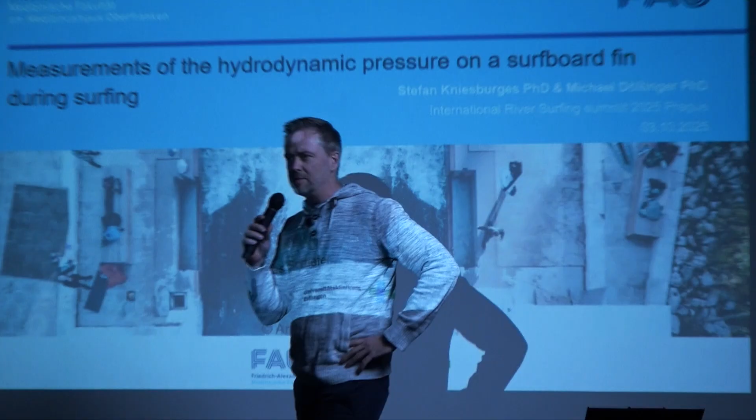My name is Stefan Kniesburges. Together with my colleague and boss Michael Döllinger, we are working at the medical department in Erlangen university, part of the ENT department—ears, nose and throat. We deal with the aerodynamics in respiratory systems, especially in the larynx.

The two vocal cords oscillate with a very high frequency, and about 8 years ago we thought about how to get students and topics for students. As Michael is a surfer for almost 25 years, and I'm a mechanical engineer focused on aerodynamics and aeroacoustics, we thought, why not simulate the surfboard or some surfboard fins? So we started, and it went on.

Our goal was to have at least one publication. Michael wanted it in his bathroom, but now we have a few more because it's so interesting, just from the physics. I want to give you today some insights into our work, and I hope I can explain it so everybody understands.

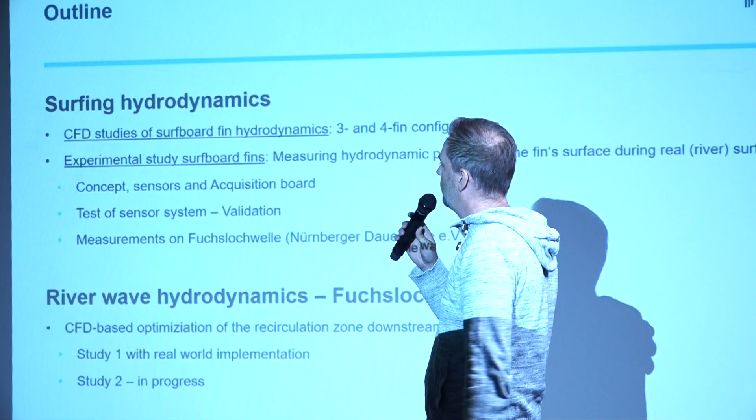This is the outline of my talk: the major focus today is surfing hydrodynamics, how we measured it. I'll start with some CFD simulations, as we started, and then come to the experimental study on surfboards, where we tried to measure the pressure at the surfboard fins during surfing. I'll also give you some impression of our work simulating the river wave in Nuremberg, the Fuchslochwelle, which we tried to optimize, and this will be the end of my talk.

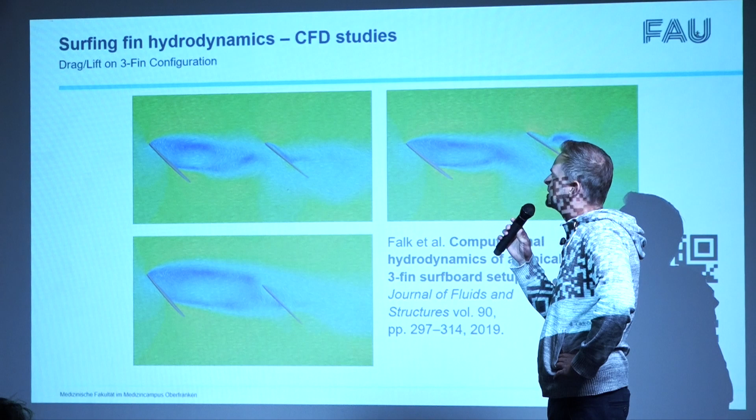So let's start with our simulations—the very beginning of our interesting side project beside the medical stuff. We started with a quite simple case.

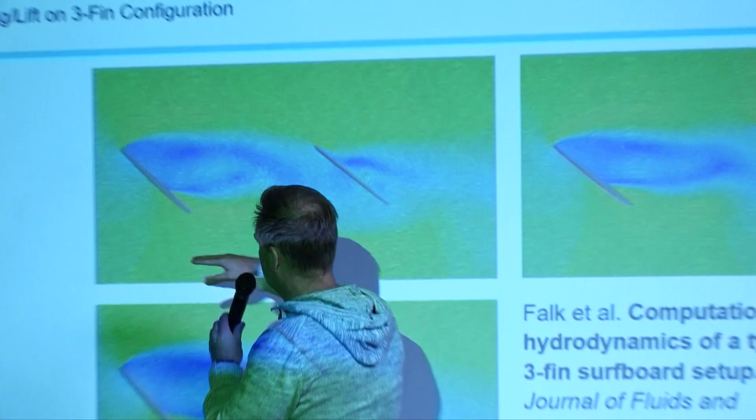We had a 3-fin configuration. Here you see the right side fin and the center fin, placed in a box full of water with an inflow from the left hand side. We increased the angle of attack—between the inflow and the chord axis of the fin—and found some nice separation areas, recirculation areas where the flow is separating from the fin.

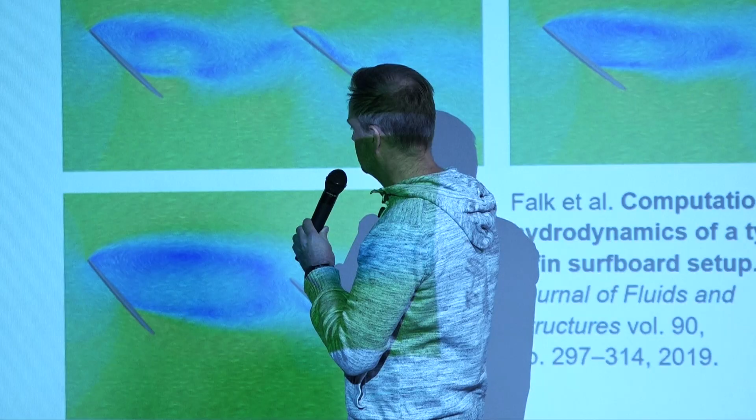It's quite similar to wings in planes, where you don't want flow separation, because then the plane is falling down without any resistance. What we found is some flow structures, vortices, which separate and push on this center fin.

We found that there is a force which can act on the center fin if your angle of attack is too large, with a frequency of about 14 Hertz. We heard from a guy from Wollongong who told us he sometimes experienced some shivering in the back, which could be this effect.

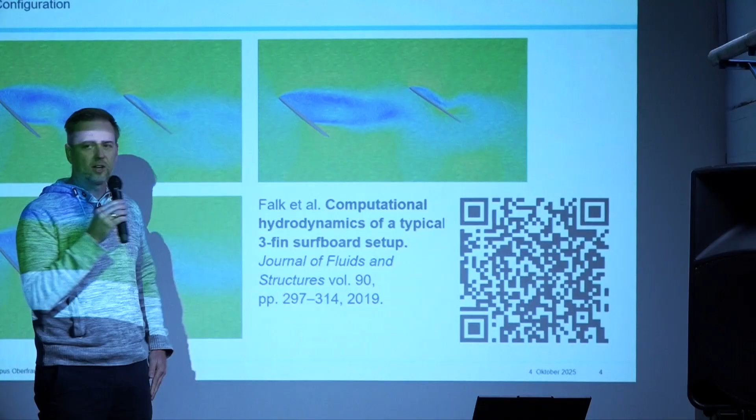So this was quite a similar simulation case, and if you want to learn more or read about it, you can scan this and get the publication in the Journal of Fluids and Structures, where we published our results.

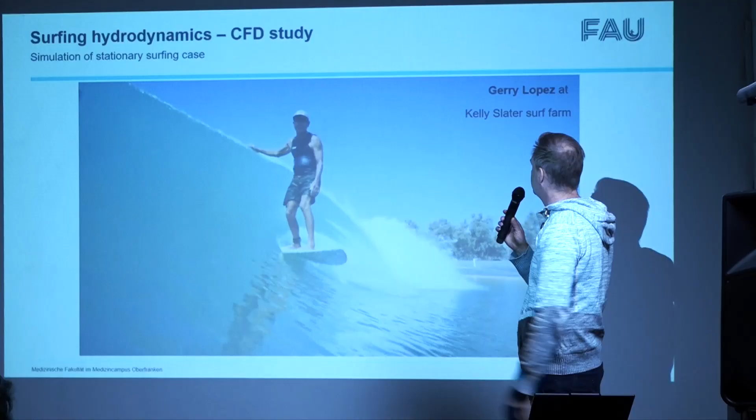Then another study, also a student project. A student found a video—it was Gerry Lopez at the Kelly Slater farm—and what he did is surf very constantly without any change on this wave. The student told us he could try to somehow measure the position, how the surfboard is constantly positioned on the surface of this wave.

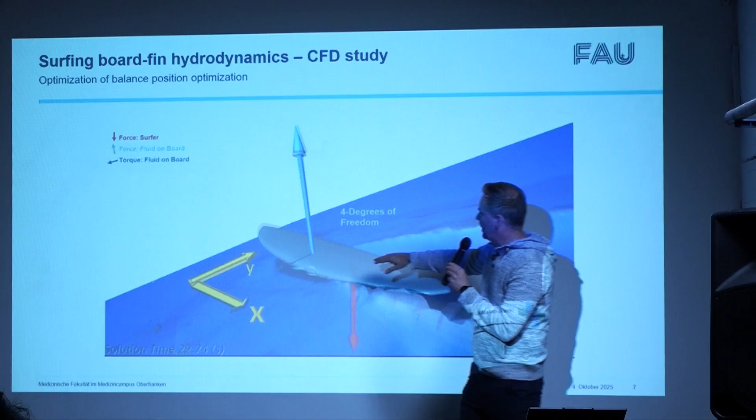He wanted to calculate the gravity force—where the gravity force acted by Gerry Lopez had to be at the surfboard to get this position. So he set up a CFD simulation with a free surface. He put a surfboard on the surface, held the position constantly, and then we had the lift force.

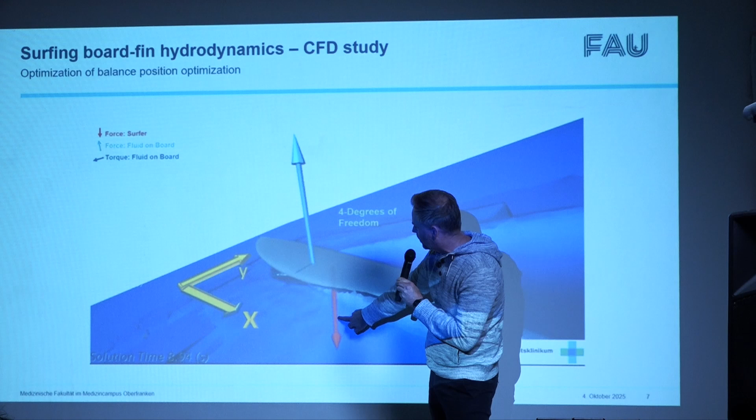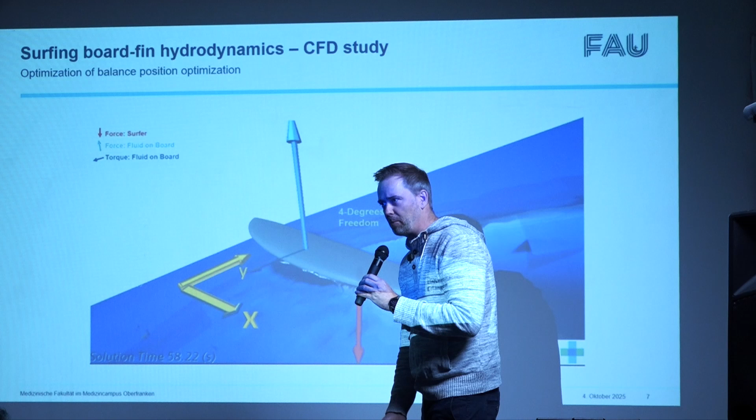We had here the lift force in blue from the water, and this is the gravity force. He developed a mathematical optimization algorithm which varied the position of the gravity force, the red one, so long that he could find a place where no force is acting in these 2 directions on the surfboard. So the surfboard is fixed on the surface, and when he found the correct position where he has no force in these 2 directions, that would be the point where the gravity force, pushed on the surfboard by Gerry Lopez, had to be for this video.

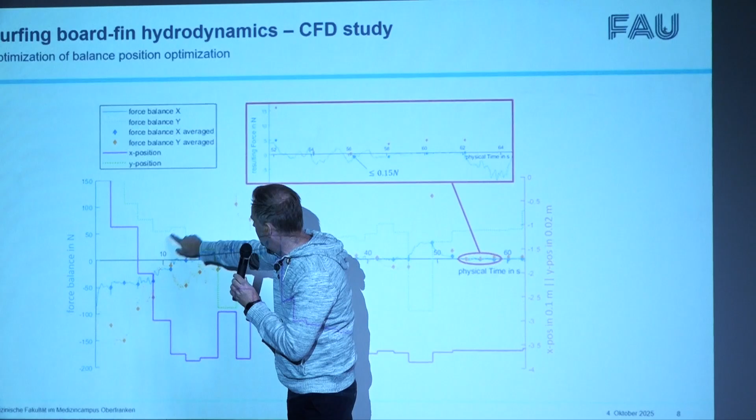And this looks like that somehow. So here you have the force balance in Newton, and you have the force in x direction in blue, this dotted line here, and this orange one is in the y direction, and the other 2 lines are actually the positions in x and y direction where the force has to act.

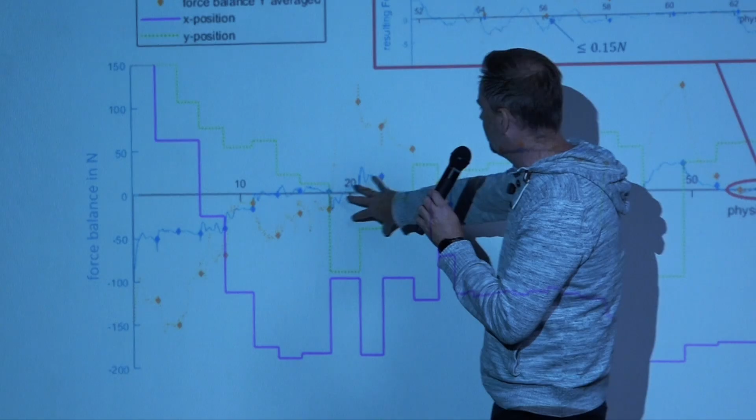What he did was simulate one position, then evaluate the force balance. If the forces are not 0, then the force would be positioned somewhere else. This was done for a lot of simulations, and at the end point we got both forces almost to 0, and then we had the 2 positions which are at the very end of the surfboard.

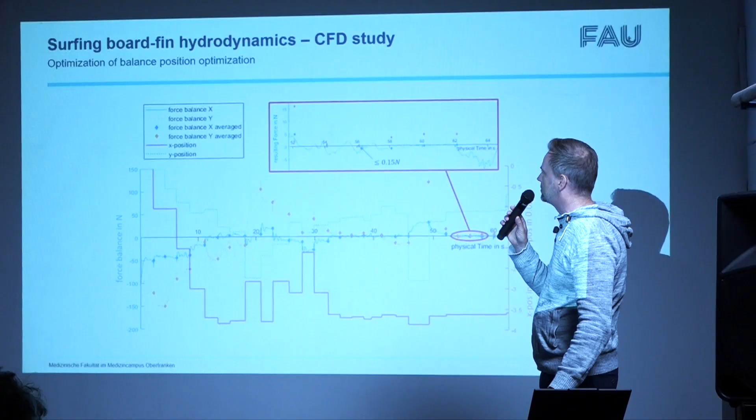So this was also a student project which we tried to publish soon. Those works were our motivations to think about what we can do next.

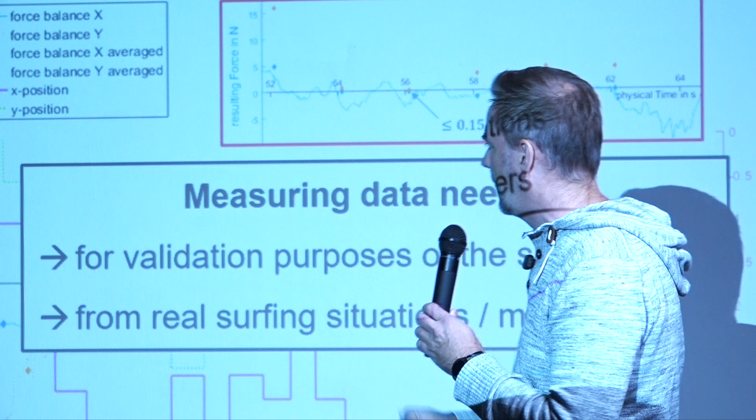If you are doing those CFD simulations, it's purely done in the computer. If you want to publish this, the reviewer will ask you, okay, it's only computer simulations, is that valid? Is it correct? Did you do correct modeling? Therefore you need to have some measuring data.

So data which were measured, and you can say, okay, here we measured velocity, and the velocity is similar to what we simulated, and therefore you can validate it. Also, we cannot simulate every surfing maneuver or everything because it's too expensive. So we need real surfing measurements in real surfing situations.

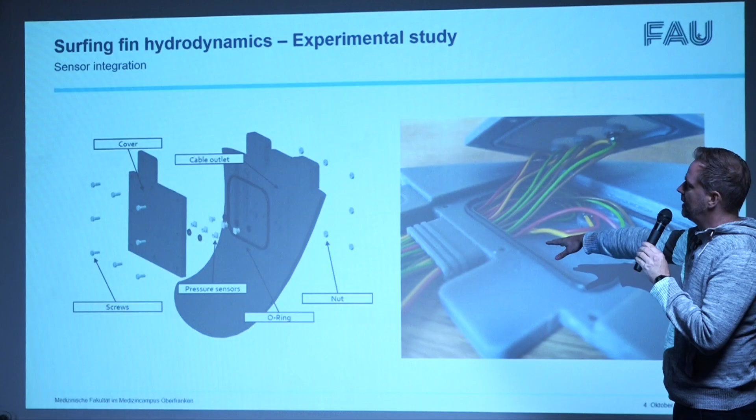So we started our project of the experimental study, and we measured the hydrodynamics on surfboard fins. We took an ordinary FCS fin geometry, then implemented a box in it sealed by a rubber ring, and placed very small pressure sensors on the inside and outside, on both sides of the fin.

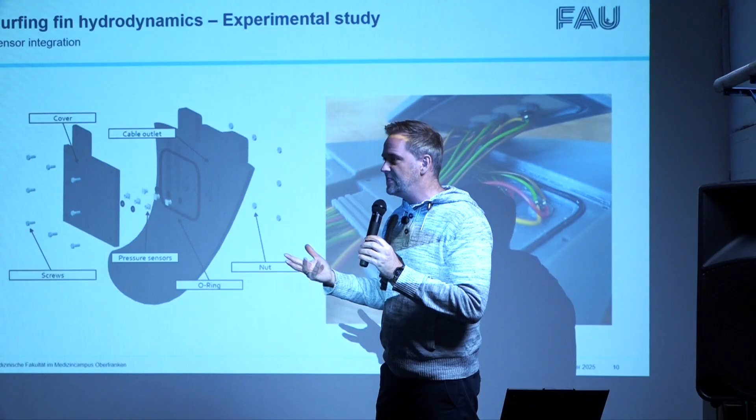I will show you later on. Here's a photograph of this configuration. Here are the sensors, connected by wires fed through the foot of the surfboard into the board, where we implemented an electronic acquisition board to measure and acquire the pressure during surfing and store it for analysis later.

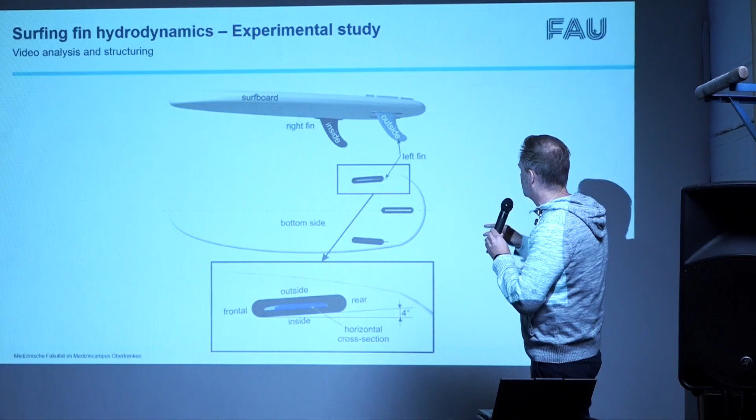So this is what the whole surfboard looks like. We used a two-fin configuration, leaving out the center fin to avoid interaction, as I showed you on the second slide. We wanted to avoid those interactions, to have the pure flow passing one side fin.

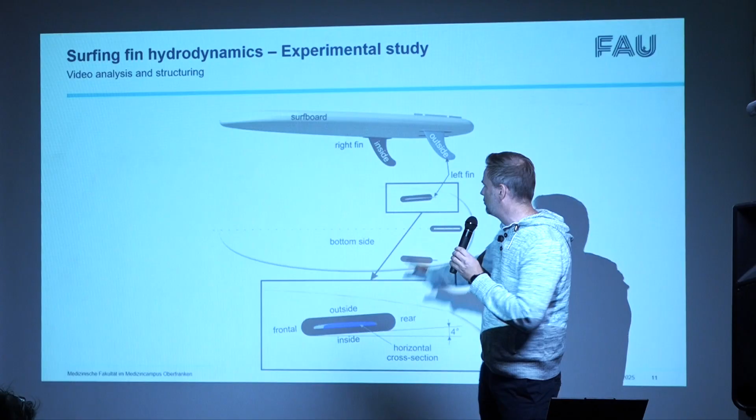So we took the left fin of our surfboard and equipped it with 4 pressure sensors, 2 on the outside and 2 on the inside of the fin. Please remember this nomenclature, that we have the outside surface and the inside surface, because that becomes important in the next slides.

What's also quite interesting is if you look at the cross section, if you make a cut through this fin, we have a profile pretty similar to a plane wing. So we have a curved outside surface and a flat inside. This becomes quite important when we look at the measured data.

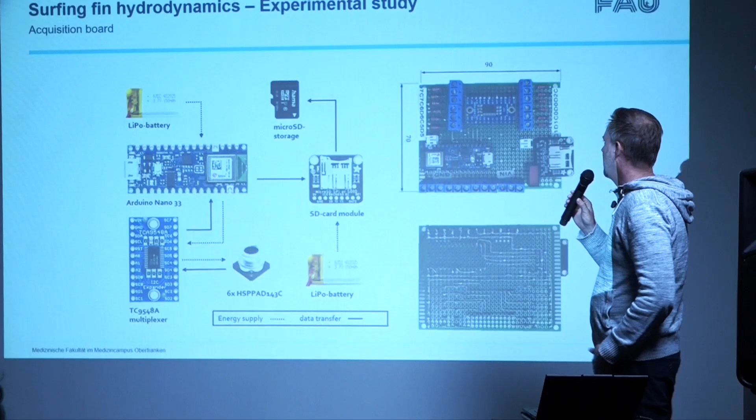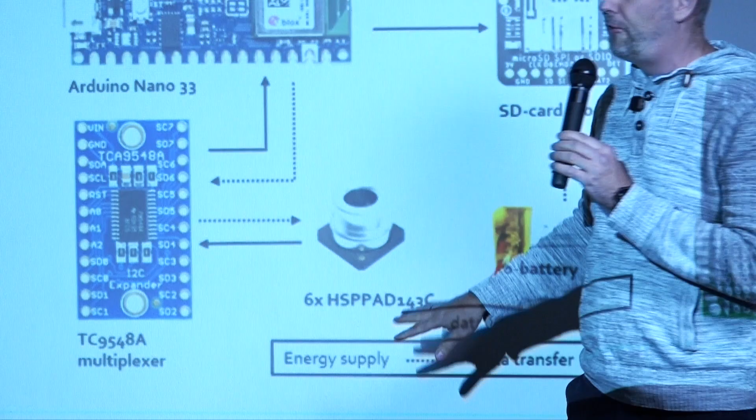So this is actually the acquisition board the student who worked on this project developed. We have a controller where the acquisition program was stored and performed. Then we have a multiplexer connected to our 6 pressure sensors, a storage unit, and of course we needed lithium batteries just to have the power.

This was then assembled on an electronic board, and this was implemented in the surfboard and worked autonomously after we started the program.

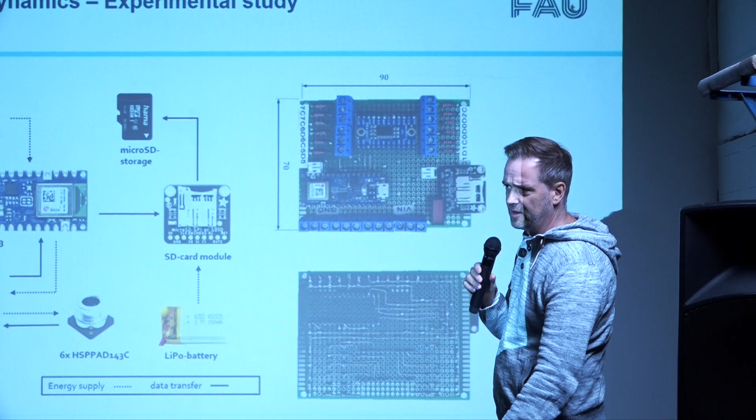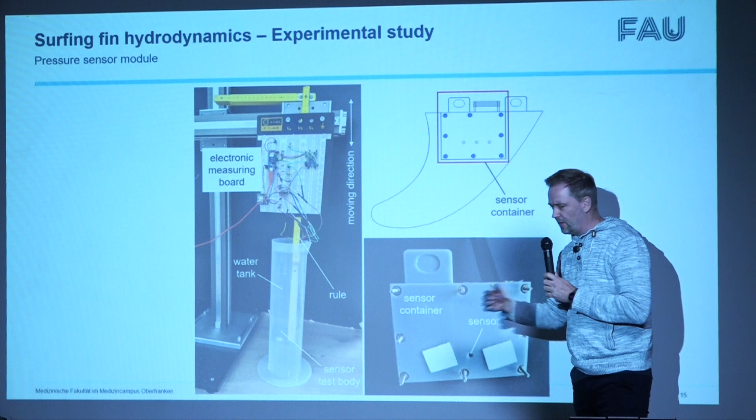And then we did some ordinary tests. We had a static diving test where we just dived the pressure sensors at a certain depth. By this equation, pressure as a function of depth, with density, the gravitational constant, and the depth of water which we can measure, we see that it's quite linear, and it follows really this rule described by the equation.

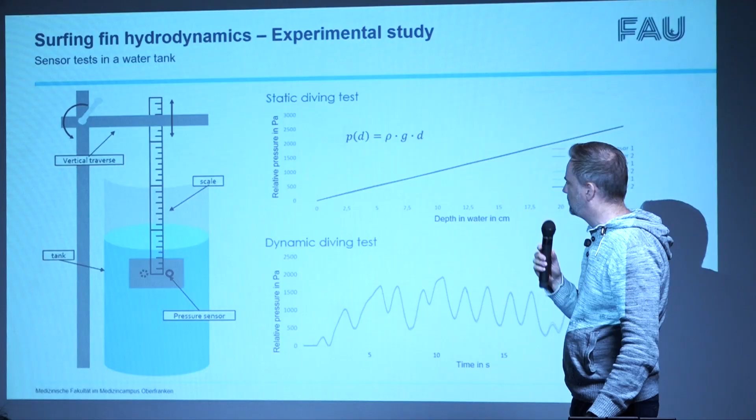Then another test was a dynamic diving test, so we just randomly dived this prototype up and down. We recorded that with a video camera, and at certain positions we checked the depth, calculated how large the pressure should be, and compared it to the experiments, and that was also quite valid.

Then we went on to the Fuchslochwelle to check whether our system is working during real surfing. So this was the whole setup.

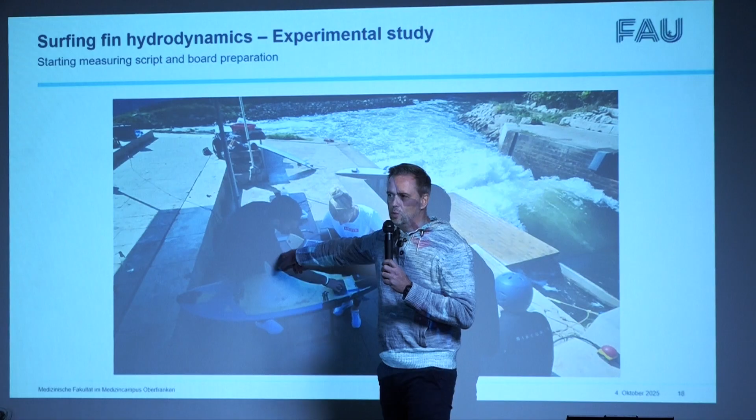You see here the wave. This was Nina Punger, the master student who wrote her master thesis about this topic. This is Dr. Boaz Stur, a former PhD student. He just finalized his PhD at the beginning of this year.

At the moment, they are sealing up the box, and they just started the algorithm to measure. Then we had 5 minutes to measure, and then the storage was full.

Now, when I start the video, you see that the cap is on the box; it will be fixed by screws, and afterwards it's additionally sealed with some gaffer tape, just to be sure that no water is coming into the box. Since it's at the tail of the surfboard, it's pretty probable that water comes on top, and if it's not tight, we would have a problem. But it worked so far pretty well.

And the surfer was sitting here and had to wait until everything was prepared.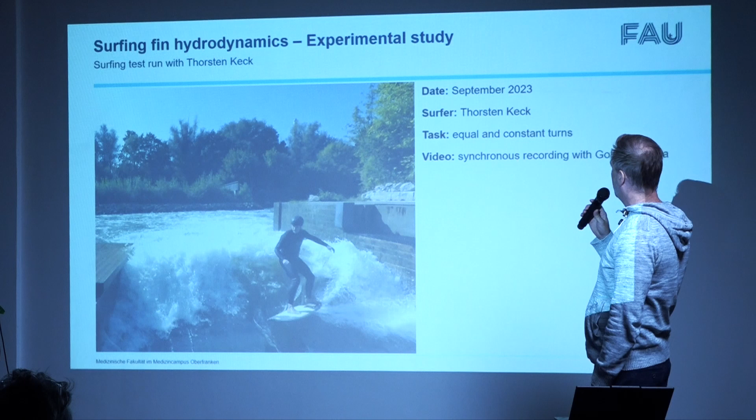And then we asked a surfer, Thorsten Keck, to perform very nicely and smoothly and equal turns, as many as he could, and he did a quite good job, you will see. And then, in addition to our pressure acquisition, we also made a video, synchronously started with the pressure measurements, so we could relate the position of Thorsten with the surfboard to a certain pressure value, which is quite important as you will see later on.

But let's observe Thorsten surfing here. It was really quite nice and quite slow, not that sharp turns, as we requested. So I think that deserves a big applause for Thorsten.

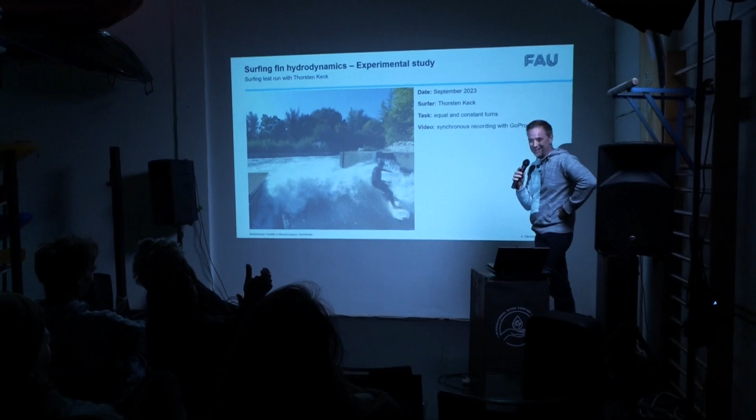Without that, it would not have been possible. A 20-kilogram board. Yeah, that was true. We had some other guys, for example, Michael, but we needed to add Thorsten because Thorsten is very large and his weight is much higher, so he can manage this board. For the other guys, the weight was not large enough to manage this board on this wave. So actually, this was quite a good factor in our experiment.

So let us come to the results. First of all, we fragmented the video. We split the video up into all the single pictures, and then we had our time frame, which is synchronous in both signals, so pressure signals and video signals. And then we searched for moments in the middle of a turn, when the surfboard is aligned parallel to the main flow direction, as it is in this case, or in this case, and so on.

So we have 7 turns, and we had the time points where the surfboard is aligned parallel to the inflow. This is marked by this arrow. At this time point, this figure was recorded. And in between these 2 time points, we have these traveling regions where Thorsten traveled from one side to the other. And if I now show you the pressure signals,

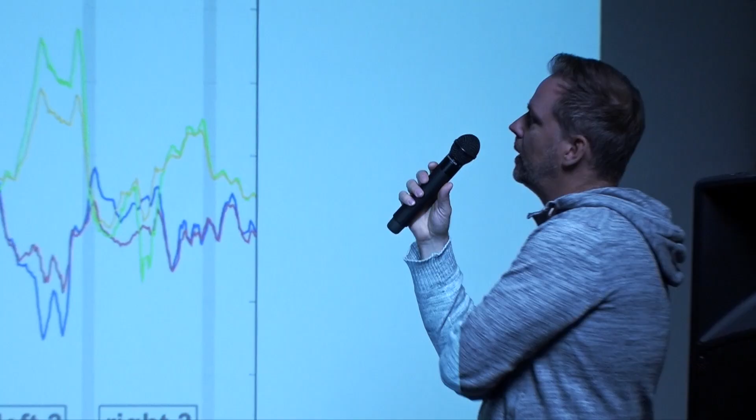this diagram is the relative hydrostatic pressure. So it's the pressure relative to the environmental pressure, the difference between the pressure measured and the normal air pressure which exists here on Earth. The x-axis is a time axis, the same period as I showed you with the pictures. And we had 4 pressure signals. At the outside, it's blue and red, so these 2 graphs are the pressure at the curved outside of the board, and green and yellow is at the inside.

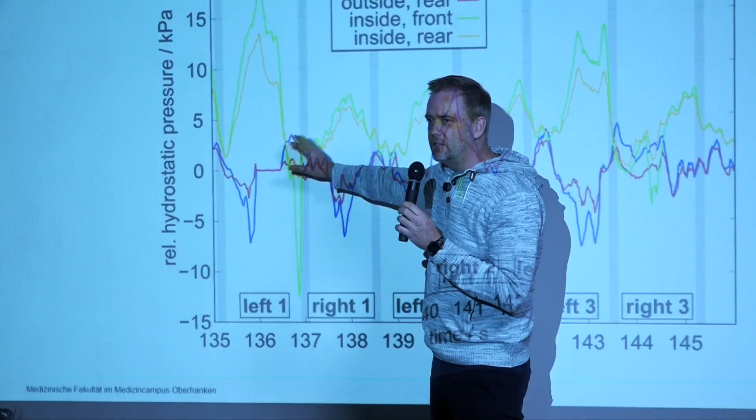And the first thing was we were quite happy that we got a really nice periodic and systematic signal. Because at the turn points, where the board is parallel to the inflow, we had a really small pressure difference between the 2 sides, between inside and outside. But during the traveling periods, we had a very large difference between inside and outside.

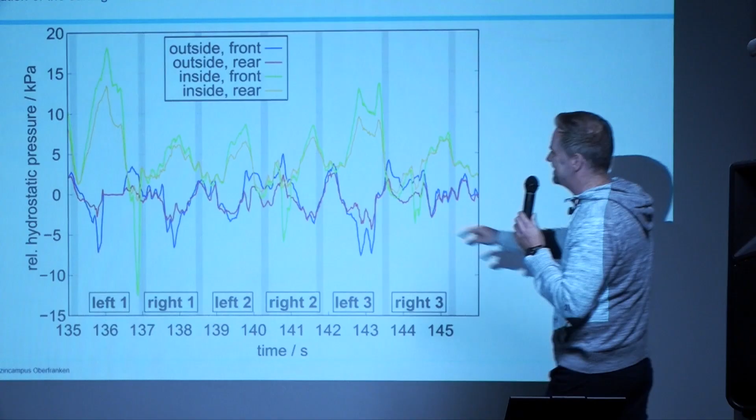The only thing we were surprised about was that it stays the same, without any dependence on the direction he traveled. It's the same for travel to the right and travel to the left. Our expectation was that it has to shift somehow, so that for left it looks like that, but for right, blue and red had to be positive and these had to be negative, because it's the other way around. We were wondering why this happens, and therefore we made this schematic sketch.

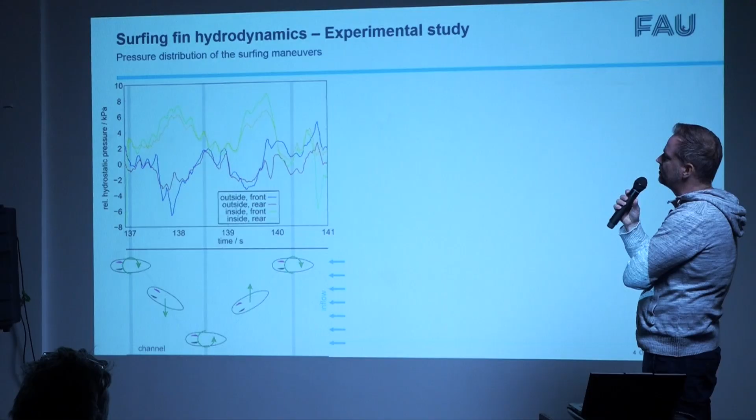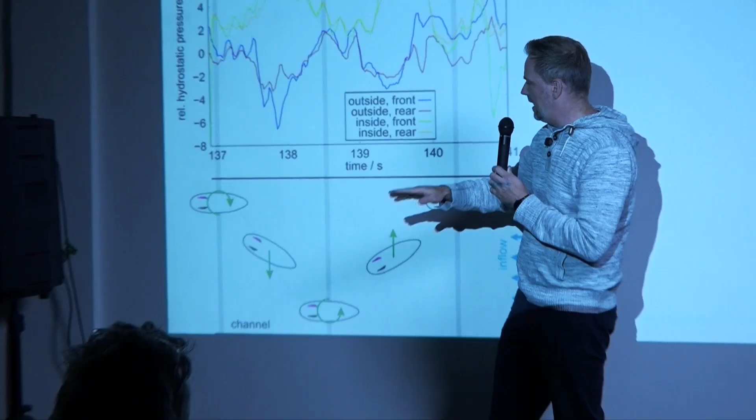So these are now two zoomed-up periods, three turns with 2 traveling periods. And the board position looks like this. Just remember, it's not the case that the board is going to the right. It's just the time axis. For a better display, it looks like the board is going to the right-hand side, but it's actually standing in the same position and going to the left and to the right side of this channel.

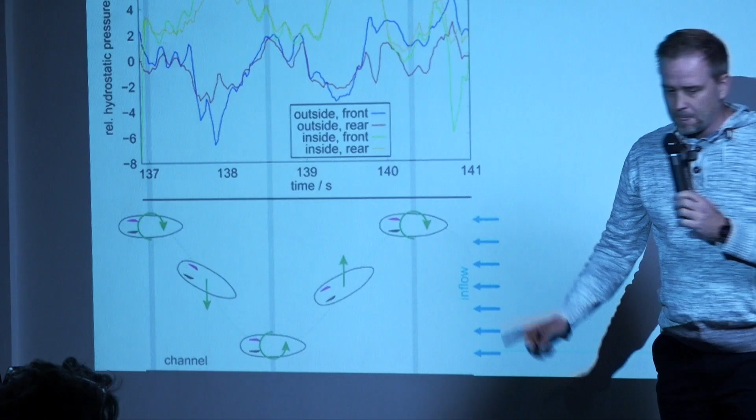When we now zoom this up a bit and look at the inflow to this left fin, which was equipped with the pressure sensors, and we look just at the turning points where the board is parallel, then we see that the flow is just the flow coming from the wave, nothing else. At every point it's the flow coming from the inflow.

But during the traveling, we had another component, and this is the velocity Torsten had during the traveling. Therefore we had to do some vector addition, and we get another component. This is the actual component which acts on this equipped fin during the traveling. And if you see that it's directed from this side to this side, and this is the other way, then you see it's not that different.

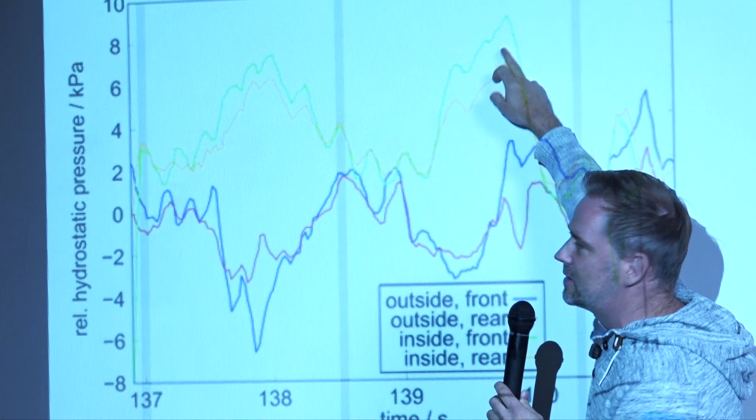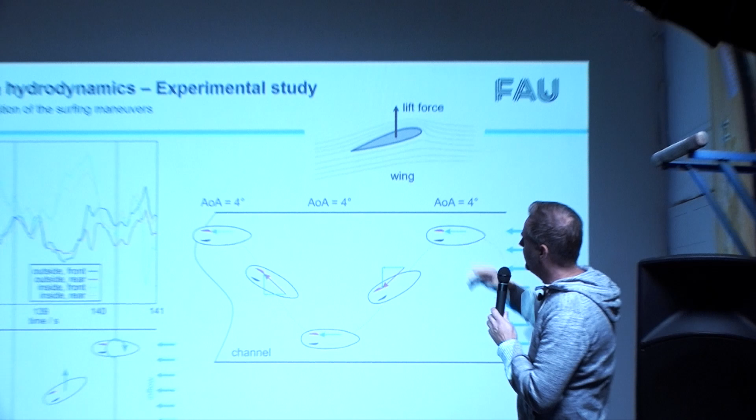It's nicely aligned to this wing, and therefore it's not that surprising that this difference looks the same. We have a higher pressure at the inside and a lower pressure at the outside. Why is this the case? Because we have a curved outside and a flat inside, as is the case for a wing on aeroplanes. You know that on the wing of an aeroplane the upper side is curved and the lower side is not that curved, and therefore we get a lift force, so we get a lower pressure at the upper side and a higher pressure at the inside.

And this pressure difference, which we actually see here, gets the aeroplane into the air. But here in surfing, it's the other way around, because the wing is actually aligned in a vertical direction. So in this case, we get a lift force in this direction. And if we assume that on the other fin the same happens, then we have there the opposite force in the other direction.

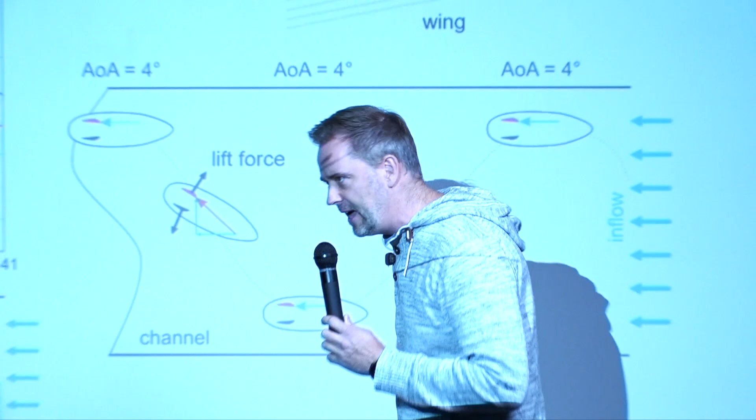And our assumption was then that these two lift forces actually stabilize the rear end of your surfboard. So you're standing there with your back foot, it doesn't matter if left or right, and these two forces acting to the outside are stabilizing the rear end, so you can have a very stable rotation point and can actually guide your fin with the forefoot, which is not stabilized because there is no fin in it. And that was then our interpretation of the pressure sensors which we measured there.

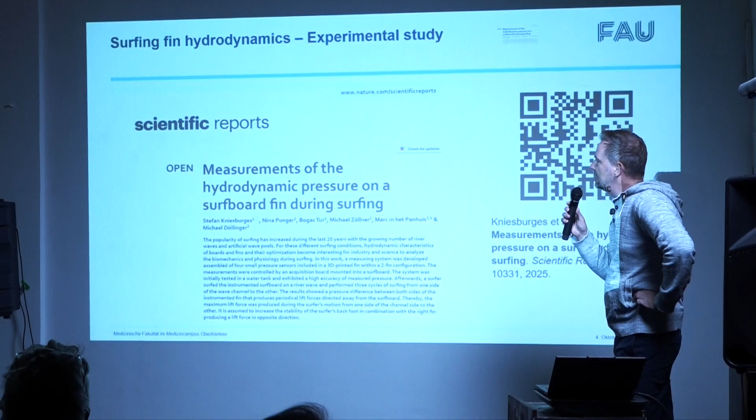And at the beginning of this year we could also publish this in Scientific Reports. And if you want to have another check and maybe read what we wrote there, you can also take a photograph and then have a closer look at this one. So that was actually our current experimental study about surfboard hydrodynamics.

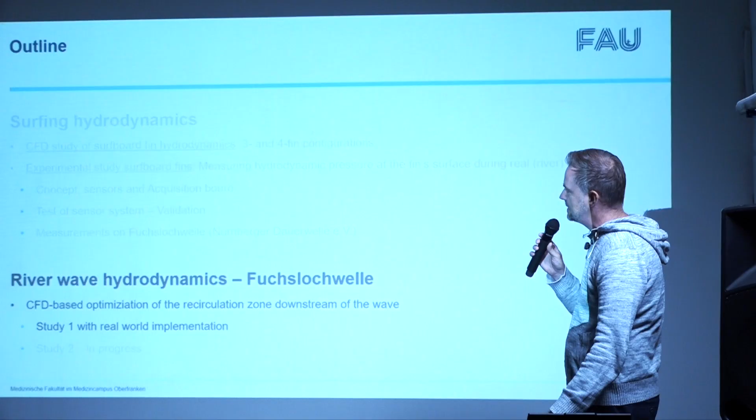The other thing which we are doing is simulations, so CFD simulations of the river wave in Nuremberg. And our motivation is actually to optimize the shape of this configuration. And we are not focusing on the wave itself, so to improve the wave, actually to increase the wave height.

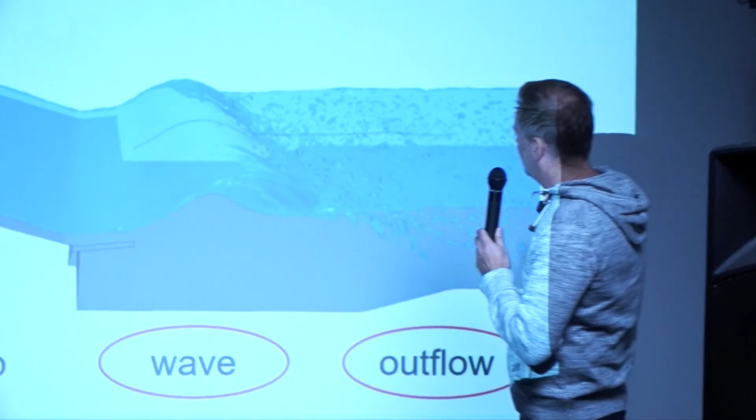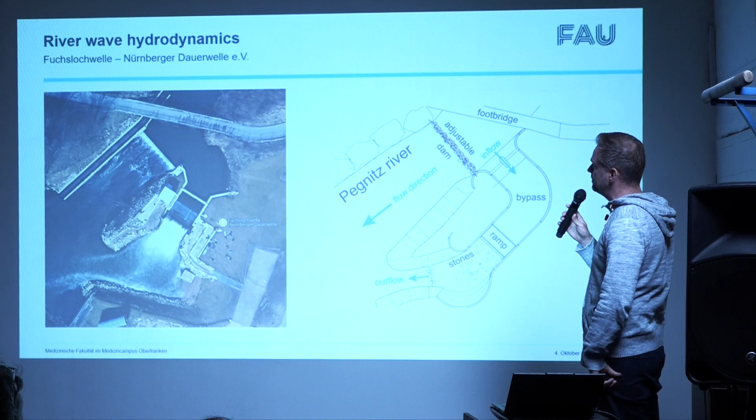And what we also found out is that this region just downstream of the wave, just behind the wave, is quite turbulent and quite uncomfortable, especially for beginners, because here you have a high mixture, turbulent flow with high entrained air and so on. So your natural lift of your body in the water is decreased. And as this is very unstable, we tried to somehow stabilize this one behind the wave. So we had a study, the first study, in 2023, which we started by CFD.

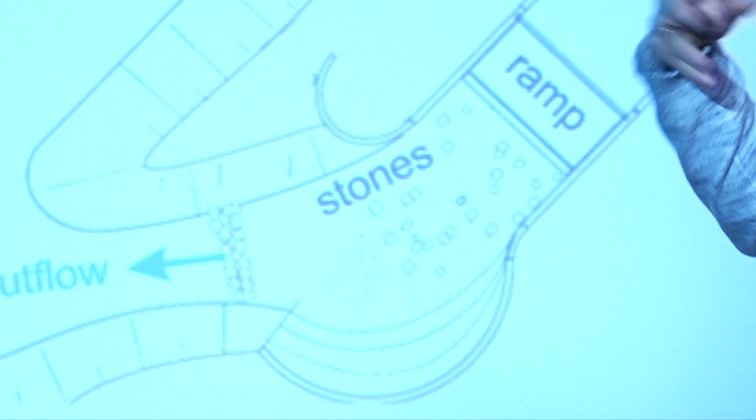So this is actually a plot of our river wave there. You see the river Pegnitz. This is the Pegnitz, and they just dug a bypass here. And here is the actual wave module. So it's a ramp with a kicker, and that pushes up a wave where you can then surf. And actually this down there is the region where you fall in and where you have to swim to the sides and to the land again.

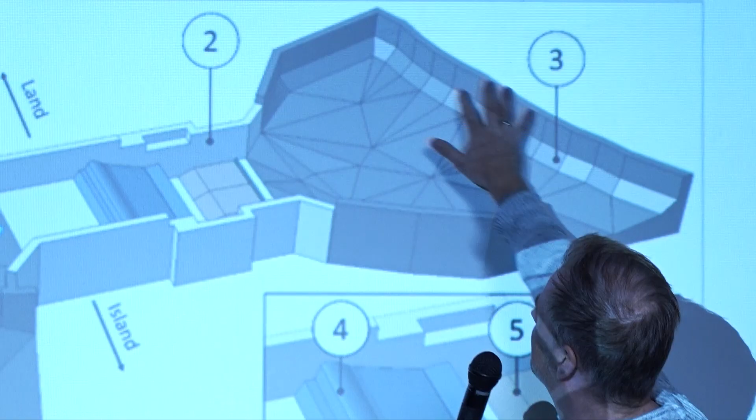First of all, we had to develop a geometrical model of that. It was quite funny because we know the geometrical dimensions of this river or this wave module quite well. So we have CAD data about that one, but we did not know how, for example, this looks like. So we know the contour, or we know the land, but we had no idea about the depth and how many stones are in there and so on. So our master student had to dive there and measure how deep it is.

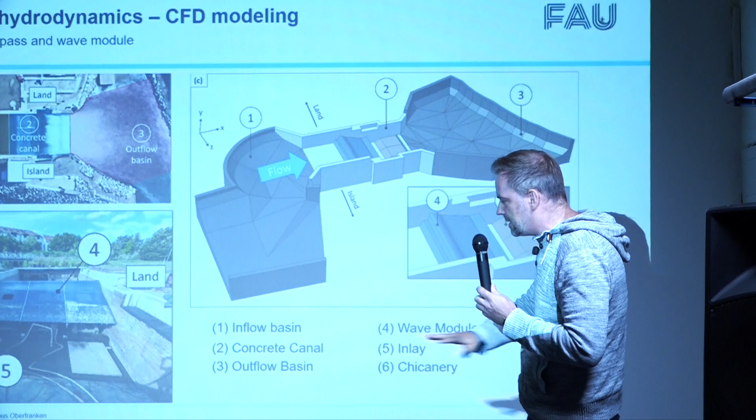And we made some grid points where he measured the depth of water, and with that he could then generate this basin, this outflow region there. And the same was done here at the inflow. We also had no idea because it was not made with concrete or something like that. So it's purely stone, sand, and everything that exists in rivers. And so he also had to measure the depth. But then he got this geometry in which we can then perform our CFD simulations.

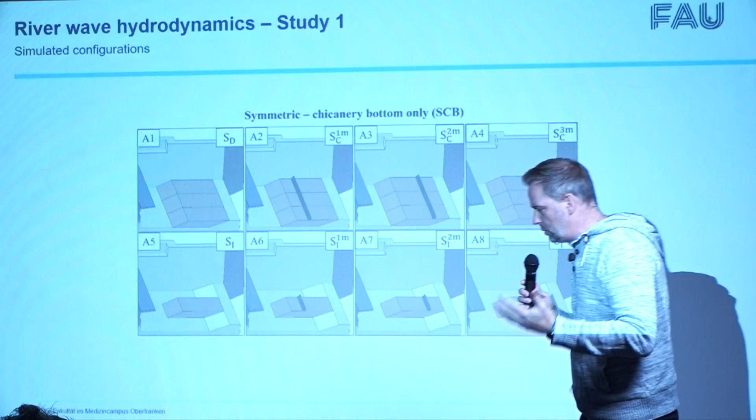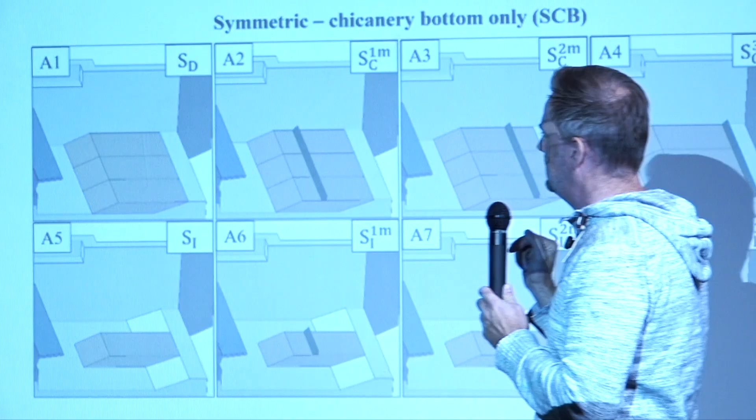And then we just considered what we can do and what we can implement in this wave module. So this is actually the situation we found when we started with the CFD simulation. So we had here the main geometry, and here are some inlays positioned in. These inlays were also for safety reasons, I can show you later on. But this was the position we found. And then we just thought, okay, how to somehow manipulate the flow, and then we decided to plug in some baffles or some fins to disturb or somehow manipulate the flow.

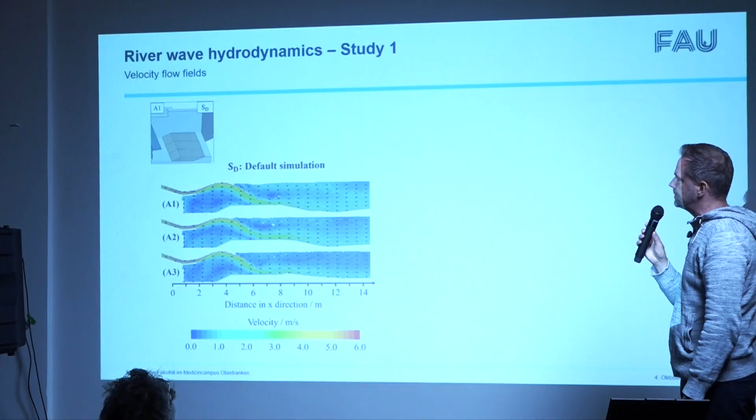So let me start with the configuration we found. So we had the inflow coming from the left-hand side. Down the ramp, we had a really high velocity. This velocity then went into the basin, into this wave module, was deflected by this kicker to the upper side, and then we had a really fast flow stream here, which then generates a large recirculation area which actually pushed up the wave where you can surf at this side.

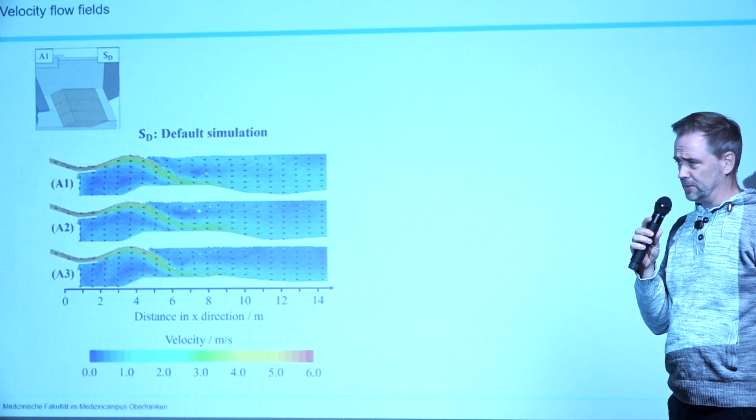But then this high velocity stream goes down to the bottom and stayed at the bottom, and this was the reason that we had this really large, highly turbulent and unstable flow field where it's really hard to get up to the surface when you fall into the water, and which was quite uncomfortable, especially for beginners, to handle after they fell in.

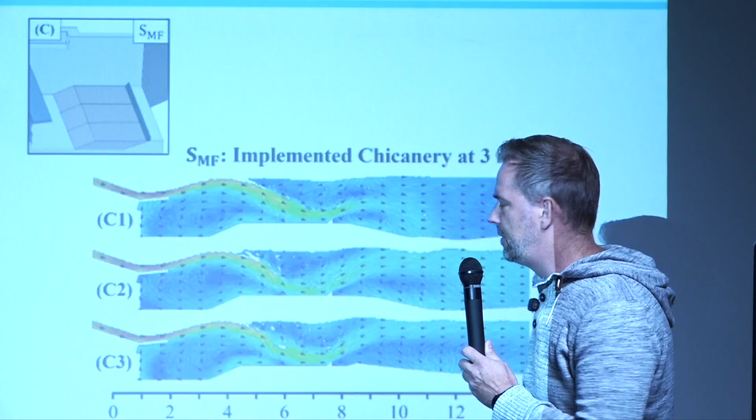But if we now just include at this position some fin, some fin-like structure, some baffle, it's also seen here at these positions. Then the thing happens that this high velocity stream went down and was then pushed up again to the surface of the river there. And by that we generated a very stable recirculation area which stays here, is not moving anywhere, it's just staying here.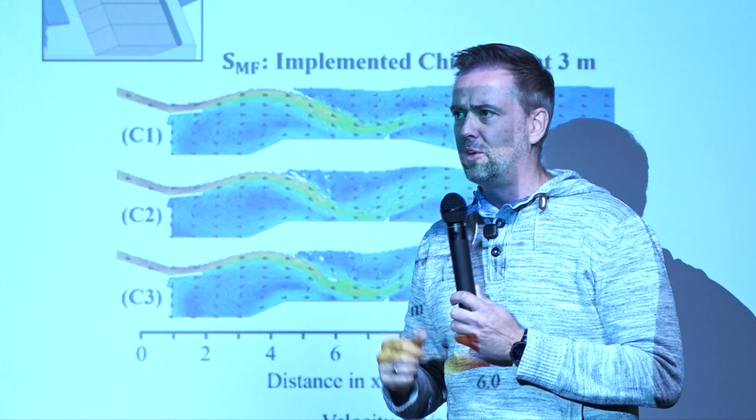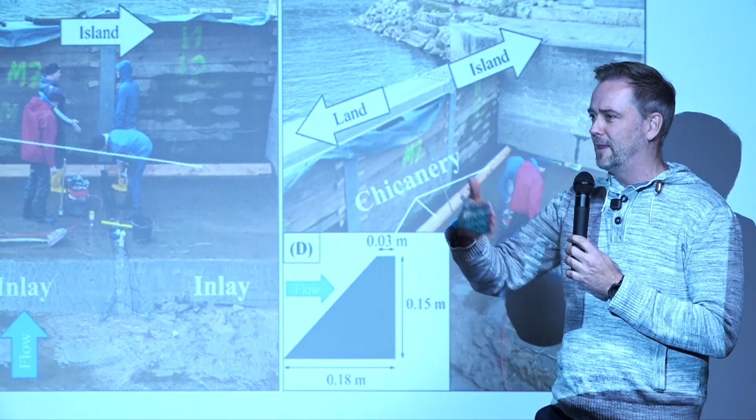And if you fall in here, you will be in this region and pushed up again by the stream to the surface. And we were quite convinced that this will work well, and therefore we made a chicane. We installed, or actually the guys from the wave installed, such a baffle. It is somehow varied, so we just cut this really sharp edge at the top of this baffle just to decrease some injury risk.

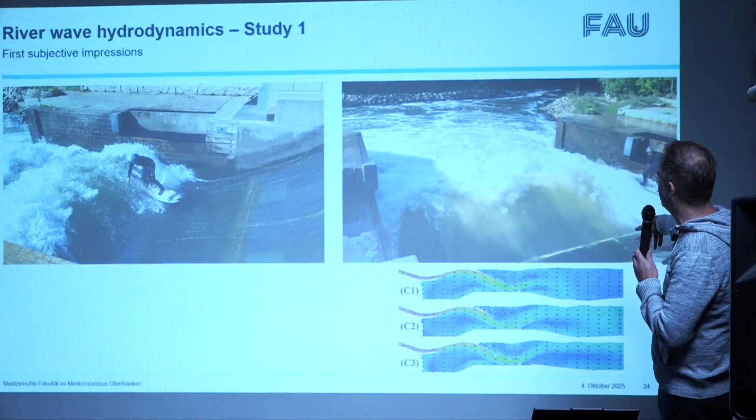And then I can show you here just a comparison between the flow field with and without baffle. So here in this video, you see that it's quite turbulent here. There's no coherent structure. It's not stable. And in comparison, this is the case with the implemented baffle. You see that the surfer surfs to one side, goes to the middle, and then he jumped in and came immediately up to the surface.

And the other thing is that if you are looking at this region, you see this welling up of the flow which comes up again to the surface. So what we simulated worked quite well in reality, and this was really quite motivating to us to do further studies and further simulations. This was also published in a scientific paper. Just make a photo and you can have a read of that one.

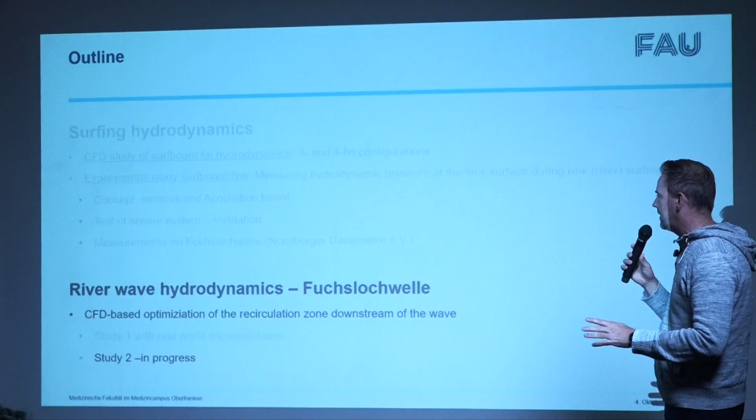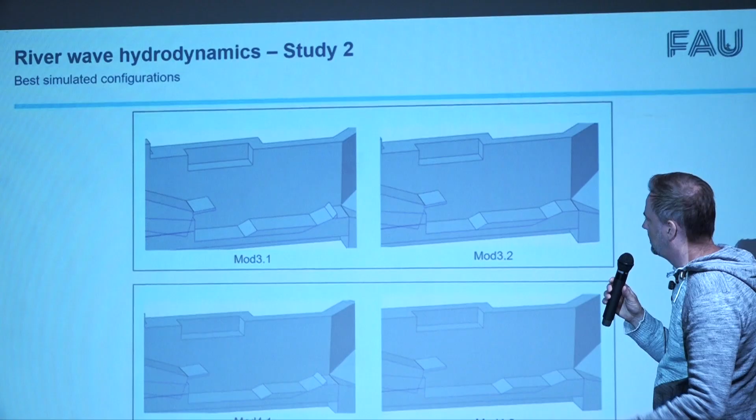And then last we had a second study which is actually at the moment still in progress. So with the first study we optimized this region just behind the wave, and the second study had the motivation to increase the wave height. And we did a lot of configurations, we had a lot of ideas how to get to the goal. But these are the two best configurations so far which we have seen.

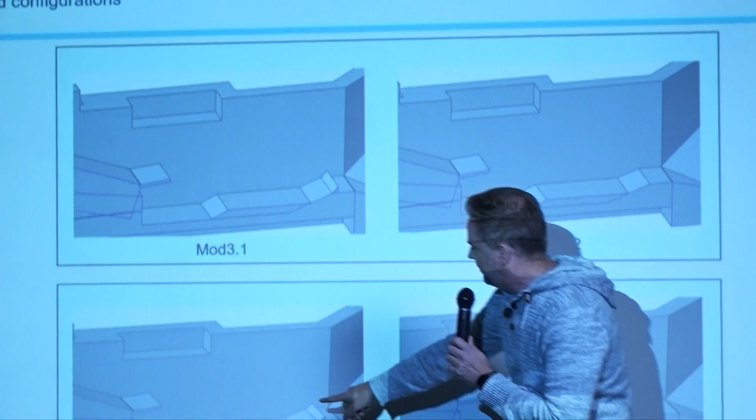The difference to the former configuration was that we decreased the height, so this dimension of the inlays. And then we even tried to reduce this inlay by half. So the height was decreased by half, and also the length of this inlay was decreased by half. And the result was that we got here a much better development of this large recirculation area. And you will see in the last slide that it really helped to push up the wave even more compared to the initial conditions.

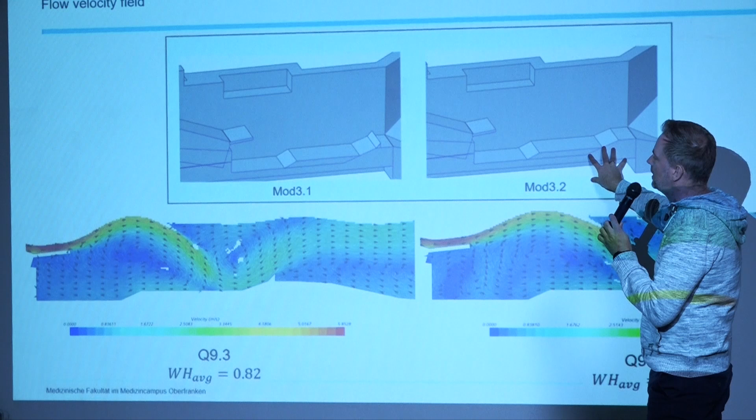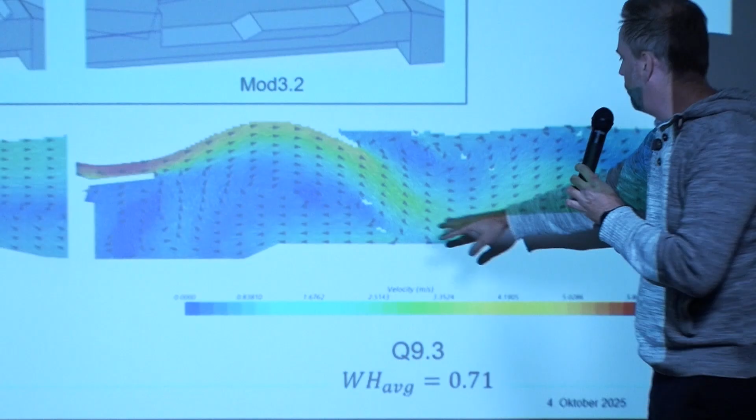Here we have a second configuration where we just removed this fin, just to see whether we need this fin or not. And by this comparison, you see that even at this configuration we had this typical flow at the bottom. We have this unstable field. So it was clear then that we need this baffle here to have this stable one in place. But we could increase here the wave height, I will show you later on. The second configuration shows actually the same.

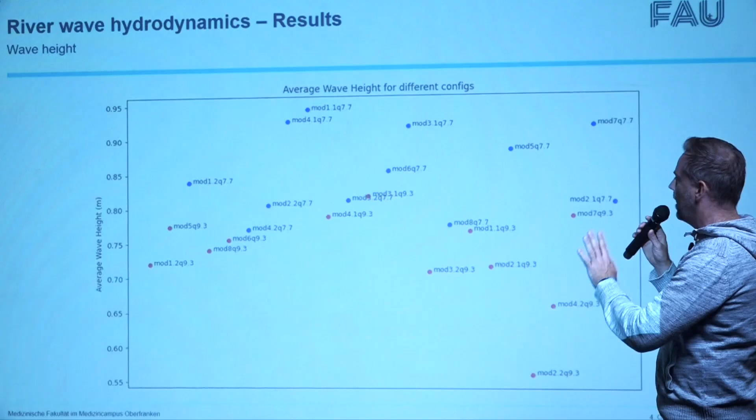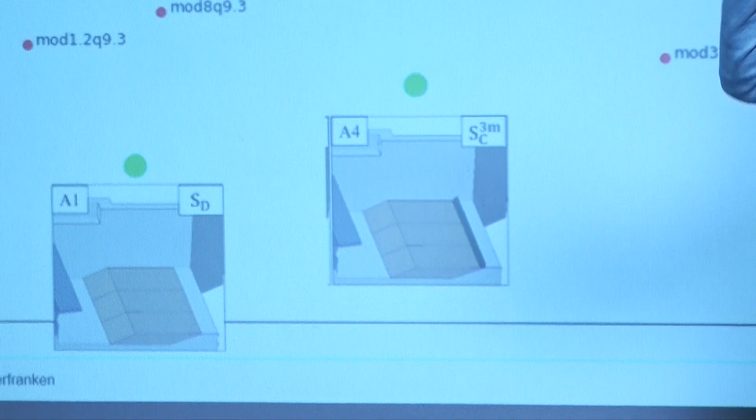But if we now have a look at this diagram, here you see the average wave height which we measured in the simulation for a lot of configurations. This is the wave height from the initial condition, about 0.65 meters. Then by implementing this baffle here, although it was not our motivation at this point, we could even increase the wave height.

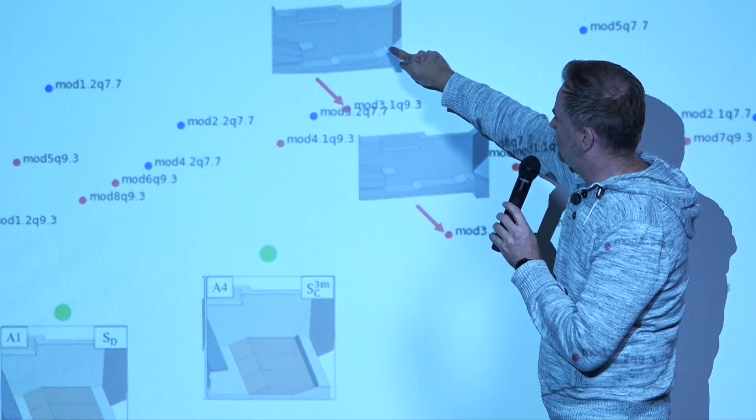But with the new configuration, where we just reduced the height of this inlay, we had really the largest wave height at about 0.82 meters. If we leave out this baffle, it's much lower. So actually, this is really the confirmation we need this baffle to have a good wave height.

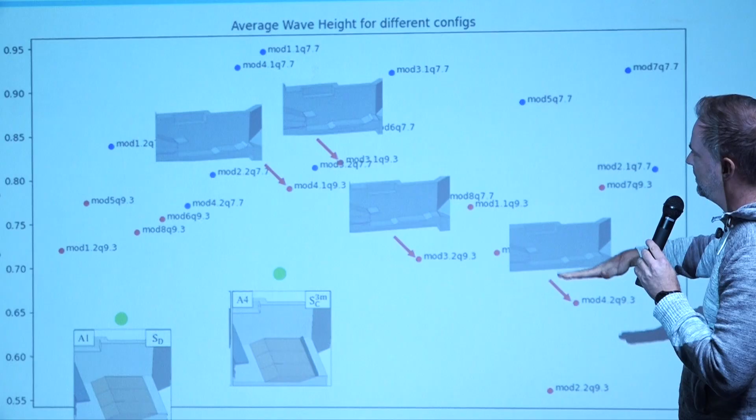And this is the other where we also reduced the length of this inlay, which is also not as good as if we just reduce the height. So this would be the next idea, or this configuration would be the potential configuration which we can try in reality at the rivers to even increase this wave height. And I think with this I'm done.